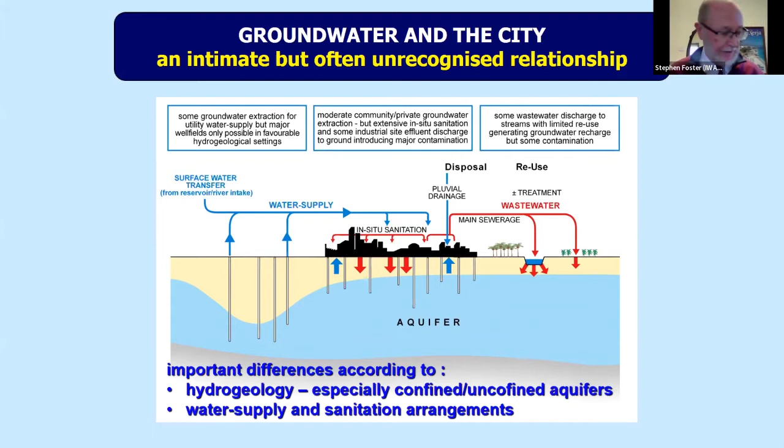Next, please. Groundwater and cities have an intimate relationship, but one that's rarely recognized. I've tried to depict it here in this small cameo with the freshwater side in blue and the wastewater side in red. And as you can see, there are many linkages. There are important differences in those linkages depending on the local geological conditions and whether aquifers are confined or unconfined, and on the water supply and sanitation arrangements. Next, please.

Groundwater is now known to be critical for the economical provision of water supply in innumerable cities and towns globally. And the current estimated dependent population is put in the order of 2 billion. Those figures are not all that reliable. Demand is always exacerbated in drought and under climate change scenarios. And local groundwater use wherever feasible is a key coping and adaptation strategy to climate change.

But rapid, uncontrolled urbanization is placing groundwater under increasing risk due to excessive exploitation and pollution. And this results in growing concerns over groundwater quality and potential impacts on human health, and also yield failure or reduction in many shallow water wells. Next, please.

Now, this is a two-way process. Groundwater is impacted by urbanization, and urbanization is impacted by groundwater use. We don't have time today to look at all of these things in detail, but I'll just give the scope of this. On the whole, in urban areas, you have increased resource availability because of recharge from water mains and seepage from in situ sanitation, despite land surface impermeabilization. But you have quality degradation from various processes.

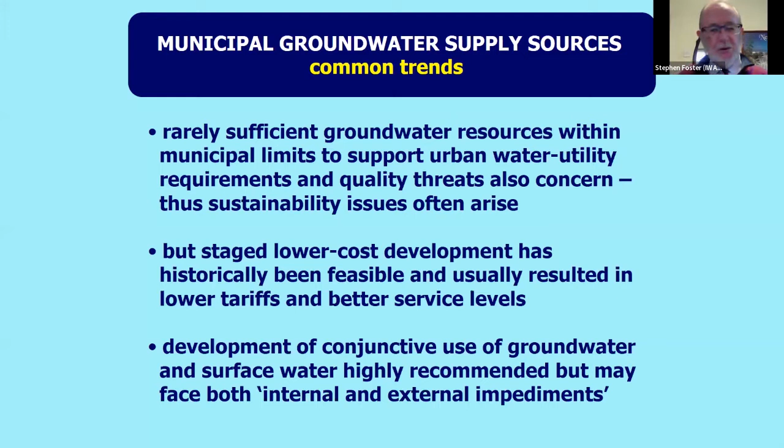I'm first going to deal with urban groundwater and some success stories in confronting the impacts of intensive abstraction. Next, please. Within the urban limits, there are rarely sufficient groundwater resources to support urban water utility requirements, and quality threats are also a concern, and thus there are nearly always some sustainability issues. But staged low-cost development has historically been feasible and usually resulted in lower tariffs and better service levels. And the development of conjunctive use of groundwater and surface water is highly recommended, but there are numerous impediments that have to be faced. Next, please.

I'll go first to Lima, where in the late 1990s and early 2000s, there was a successful application of demand side and supply side management measures to confront a serious situation. Lima is underlain by a major but not very thick aquifer, and it was heavily developed for public water supply. As you can see on the blue trace, this resulted in quite rapidly falling water levels and concerns about lack of water supply. These are further aggravated by the fact that the river in Lima is heavily polluted with mining waste from upstream in the wet season and is not treatable. So groundwater is essential for supply of something like 8 million people during the wet season at least.

So what was done, on an investment mobilized in part through the Inter-American Development Bank and the World Bank, was to enable nearly all the consumers in the urban area to be supplied both by groundwater and surface water, depending on availability. The main river tract where recharge occurs was improved and the recharge there increased. And a lot of construction was much better controlled. And as you can see, from about 1997, the water level stabilized at a groundwater abstraction of 720 megaliters a day on average, of which 320 is private.

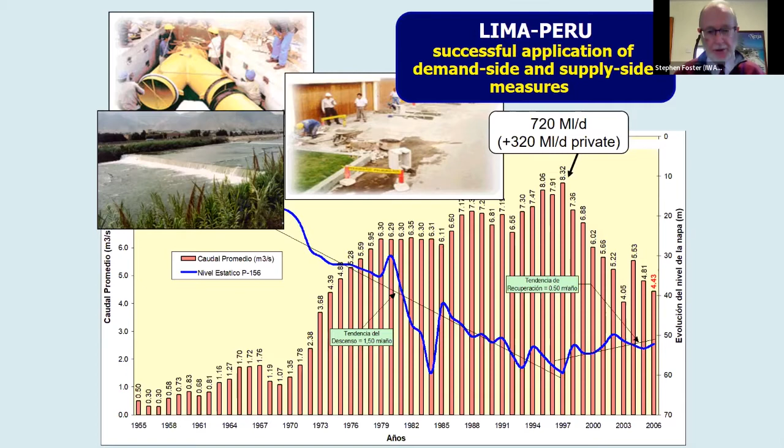And this is quite a success story for a country which has not had many environmental management success stories. And it was done by an unusual arrangement in terms of the institutions, with the government empowering the water utility to construct a special department for this work. Next slide, please.

Another success story is Bangkok in Thailand, which from the 1980s onwards was threatened by rapidly decreasing water levels and a lot of land subsidence in an area which was prone to flooding from the sea.

And what happened here was more conventional in the sense that the powers of the water regulatory authority were strengthened, and a variety of measures were taken, including a partial ban on new water well construction, closure of some existing water wells, alternative sources of municipal water supplies, and metering and progressive charging for groundwater use.

And this succeeded in stabilizing the aquifer condition in the late 1990s, and it's remained that way with some subsequent recovery. So two success stories of getting groundwater on a sustainable footing in developing cities.

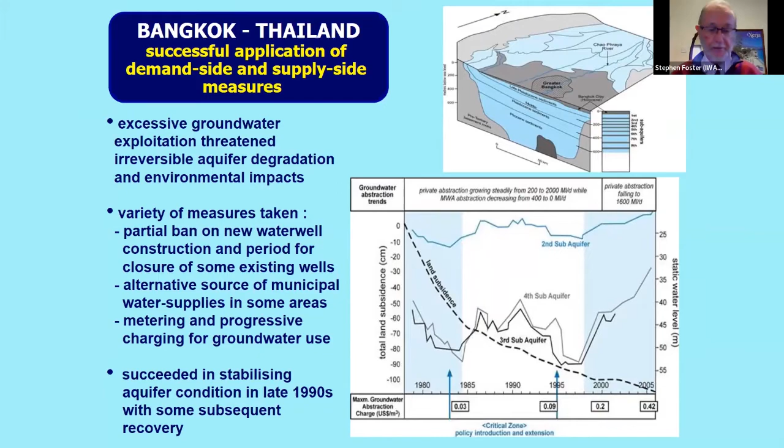Thank you. Next slide, please.

However, groundwater is also very significant volumetrically for in situ private self-supply. This greatly complicates the management equation where that occurs, and it's a major issue in Southern Asia, Sub-Saharan Africa, and parts of Latin America. Next slide, please.

It's a fast-growing phenomenon in urban areas where water well construction is of low cost, even when the aquifers are not all that prolific in terms of yield. It improves access and reduces costs for some groups of users, and represents a coping strategy initially, and very often a cost reduction strategy for those users in the longer run.

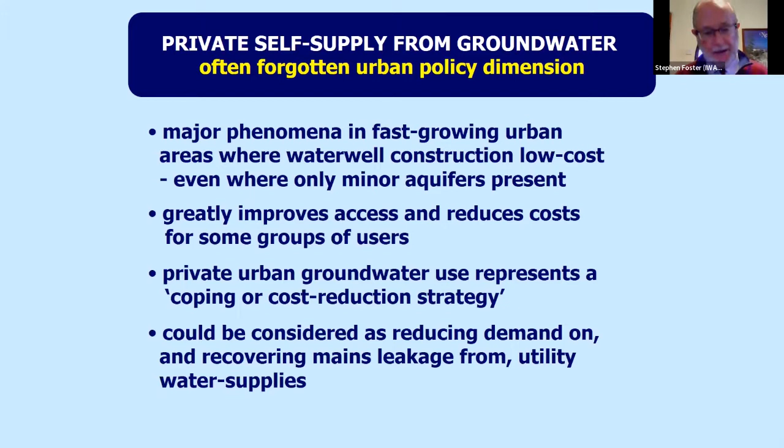It could be considered as reducing demand on and recovering mains leakage from utility water supplies, but it's much more complicated than that when you dig into the detail. Next slide, please.

My example here is from Fortaleza in Brazil, of which about half the population have water wells into dune sands. They're capable of providing about 40% of the total supply. And particularly all these high-rise apartment blocks that you see in the photograph tend to have high-yielding tube wells. And they're used these days to substitute utility water when their consumption exceeds the social tariff.

And there are consequent difficulties in administering the whole water sector in the city. For example, it's low-lying and largely sewered, and if people self-supply from their own wells, how do you pay for the sewerage? And they've now introduced measures whereby the water utility can collect sewage charges from all water users in relation to the size of their property, recognizing that an awful lot of sewage is developed through private groundwater abstraction.

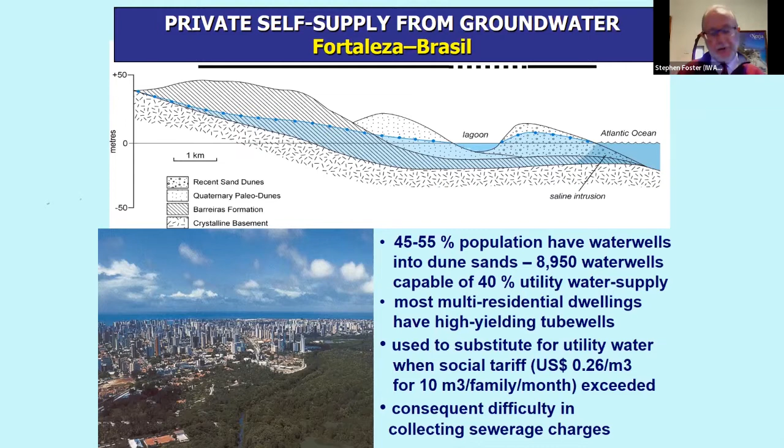And this is becoming a global problem. The worst city of all in the world in terms of the proportion of the total supply provided from groundwater privately is Lagos in Nigeria, where it gets up to about 75%. Next slide, please.

So this, as I say, private domestic self-supply distorts utility water operations and has implications for their finance and investment. It may encounter sustainability problems and also can represent a public health hazard because it's poorly monitored. But banning such practice is too simplistic, except where there are major public health or environmental hazards, and complex management measures are needed.

Enhancing recharge, reducing pollutant load, improving construction standards of private water wells and for in situ sanitation, advising users on potential hazards, charging and regulating for groundwater use. And in cities with this phenomenon, the struggle to sustainably manage groundwater is much greater. Next slide, please.

Now, I want to look at the quality issues and the contamination threats, in particular, managing the nexus with sanitation. Next slide, please. Wastewater via in situ sanitation, sewage leakage, wastewater reuse, spillage of industrial chemicals, ground disposal, and also solid waste disposal represents a common groundwater contamination threat in many environments.

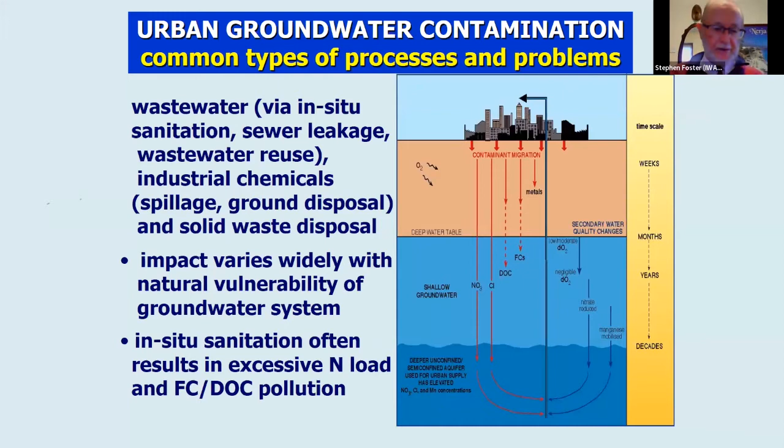Its actual impact varies widely with the natural vulnerability of groundwater systems, but nearly always in situ sanitation on a large scale results in excessive nitrate loads or nitrogen loads and fecal pollution. Next, please.

My first example here is from Natal in Brazil. This slide is a little bit small, but as you can see, the city has grown very rapidly from its size in 1984, just the small area marked by the blue arrow, to 2006, all of the red areas, and it overlies an excellent but relatively thin aquifer.

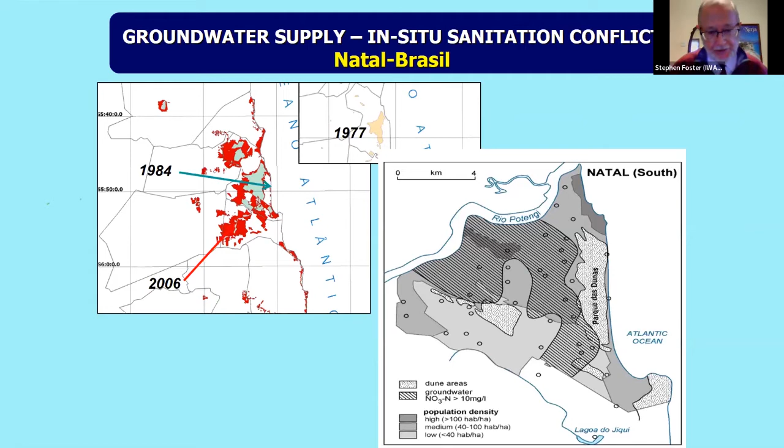And on the southern side of the city, as you can see in the other diagram, the groundwater nitrate concentrations are in excess of the World Health Organization limits in nearly all of the downtown areas. And this is a result of in situ sanitation mainly. Next slide, please.

If we're talking now about sewage sanitation, we have to look downstream for the problems created with groundwater. There are 4 examples here. The quality of the wastewater is in the pale orange circle above, and the good groundwater is in the bottom left-hand corner.

But many groundwaters downstream of cities that are sewered, in this case downstream of Mexico City, the Mezquital area, Leon, Mexico, Hat Yai in Thailand, and the Wadi Dhuleil in Jordan, have significant contamination, both in terms of salinity, nitrates, organic carbon, and other things. And this is perhaps the biggest outstanding challenge for groundwater in and around urban areas. Next slide, please.

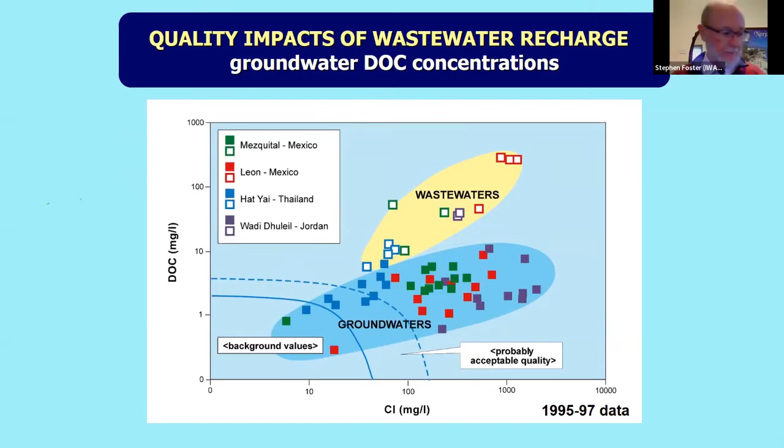You tend to see in developing cities in particular, these are on the top left-hand corner, typical wastewater being let out in canals for irrigation because it's considered a valuable resource, and then applied with flood irrigation, often to very poorly protected wells. This one is in Mexico. It's a major well for public water supply. As you can see, there is wastewater irrigation almost up to the wellhead. Next slide, please.

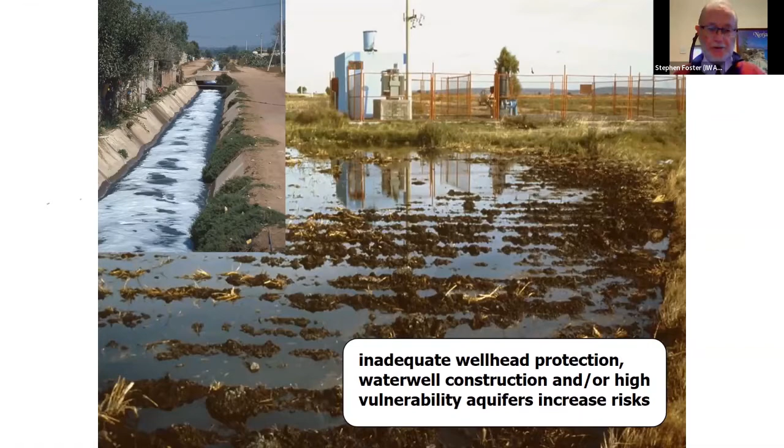And so where we do have sewage sanitation and wastewater reuse, groundwater protection involves improved spatial planning and use controls. The small pictures show that the better, more secure arrangements are ones in the lower of the 2 sections, where industrial wastewater is led off elsewhere and separated and not mixed. The domestic wastewater goes to recharge lagoons and then may be used via wells for irrigation with more security. And the public water supply should be outside of these areas and protected in a spatial sense. Next slide, please.

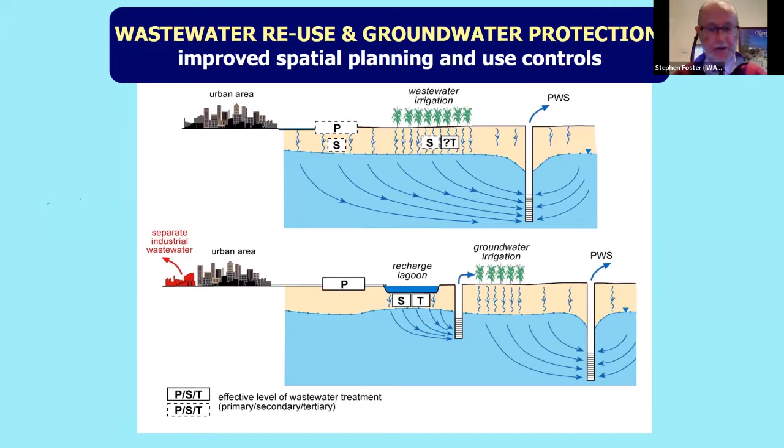I've talked about the conflict. It's not an easy one to manage. Even in terms of better sanitation, dry eco sanitation systems with urine separation offer the best type of solution, but you can't retrospectively fit these. So very often the way forward is construction of external well fields outside municipal limits, but they need the areas around them to be controlled against uncontrolled urbanization. They need much better protection, and they also need separation from the main sewer outfall areas. Next slide, please.

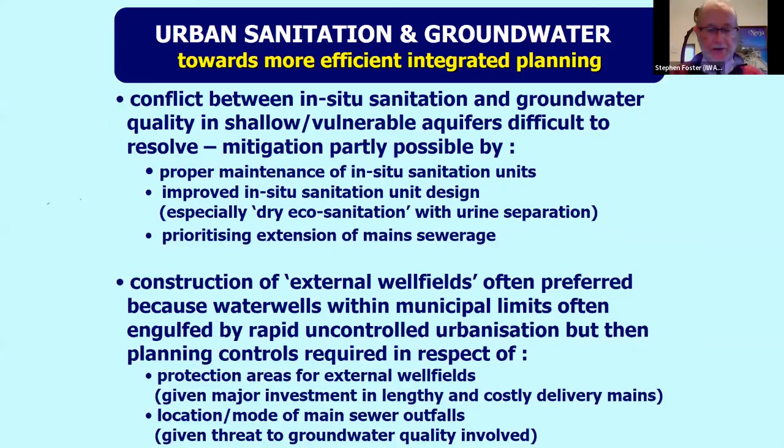So let's just have a brief word on something I don't think we're going to deal with much today, which is the control of impacts on urban infrastructure of groundwater use in urban areas. Next slide, please. It's an evolving relationship, that between groundwater and the city. It starts with a tendency, in the upper of these three sections, to a falling water table, possibly land subsidence, and other problems for the urban infrastructure and well reductions. But as the cities grow and water utilities wisely go outside and collect their groundwater from peri-urban well fields, you can get rebound. And here you're seeing rebound coming up.

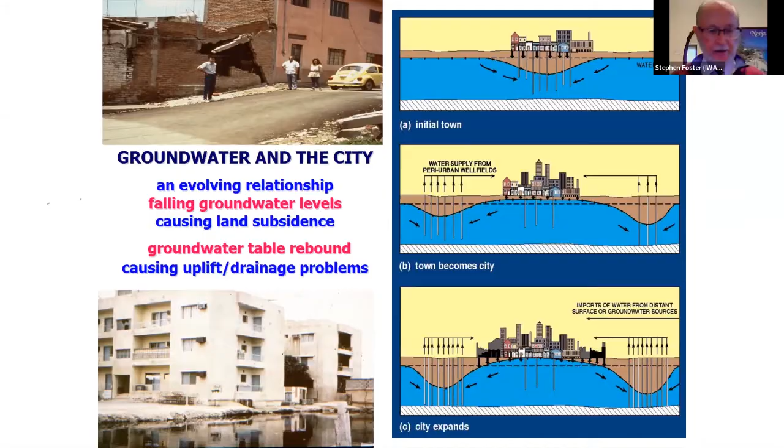And in the end, in the lowest picture, it causes problems for the infrastructure of the city itself, uplift problems on properties and drainage problems that you can see in my lower picture. So these are some of the environmental problems associated with poorly managed groundwater use and then abandonment in urban areas. Next slide, please. So this is my last slide, and I'll just take this a little bit more slowly.

Urban groundwater, we need an integrated vision. We've got to see all these facets and how they interact. It's always more significant in overall water supply than appreciated, and often the invisible link between various facets of the urban infrastructure. Urban groundwater, therefore, should be managed, even if no major utility supply interests exist. A casual laissez-faire approach is often costly and hazardous. Urban groundwater affects everybody, but still tends in many places to be the responsibility of no specific organization.

Broader stakeholder involvement, therefore, is essential, but who should take the management lead? Obviously, in the classic model, it would be the Water Resource Regulatory Agency, but very often they do not have enough capacity to do that, and you need greater involvement from the water utility, the municipal authority, and the public health ministry. Some sort of permanent sitting group of these bodies, advised by people who have a good understanding of the resource, is probably the best way to take the management forward. So I think that's my last slide.

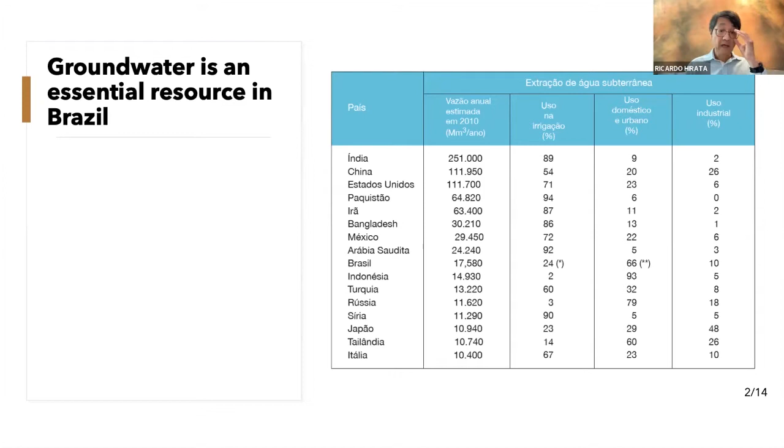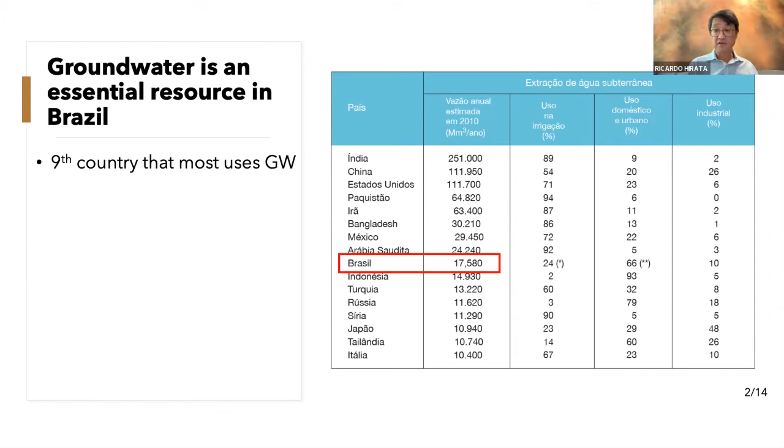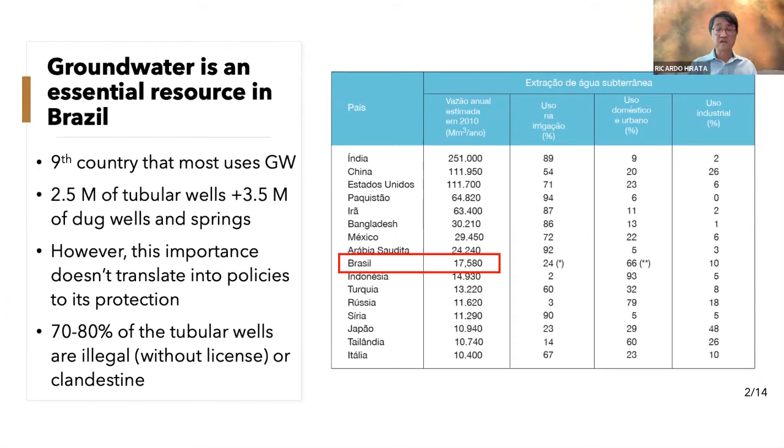And the country is the ninth largest user of groundwater, extracted through 2.5 million tubular wells plus 3.5 million dug wells and springs, mainly in the rural areas. However, this importance doesn't translate directly into policies and protections, as I show during my presentation. And one number that I like to mention is that 70 to 80% of the tubular wells are illegal. It means without license or even clandestine.

Surface water supplies 82% of the population in terms of public water supply in cities. However, it's essential to recognize that groundwater supplies 52% of the cities. It means that most small and medium-sized cities are totally or strongly dependent on groundwater, and it's a very significant resource for them. However, the importance of groundwater for cities is also associated with complementary supply to public mains, and sometimes this importance is hidden by official statistics. That's the reason I want to present the case of the São Paulo metropolitan region.

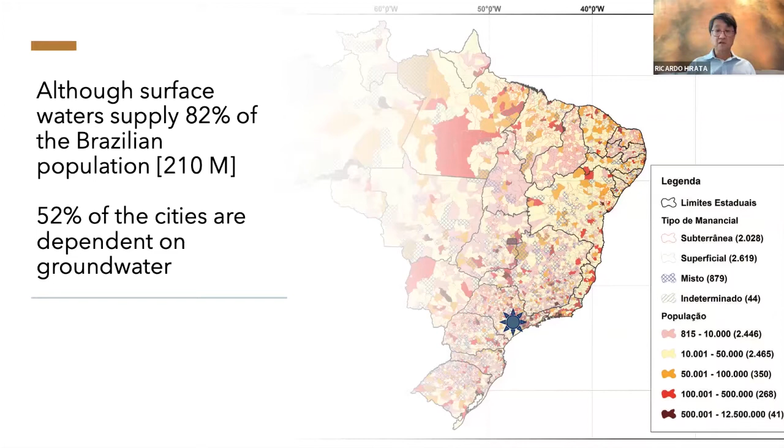This is the location. São Paulo is just under the Tropic of Capricorn, in the southeast of the country, pretty close to the coast. Well, Metro São Paulo has a population, as I mentioned, of 22 million inhabitants. The public water supply system is a very complex system of tunnels, treatment plants, and reservoirs that provides the city 64 cubic meters per second. It means that almost all the water comes from surface sources.

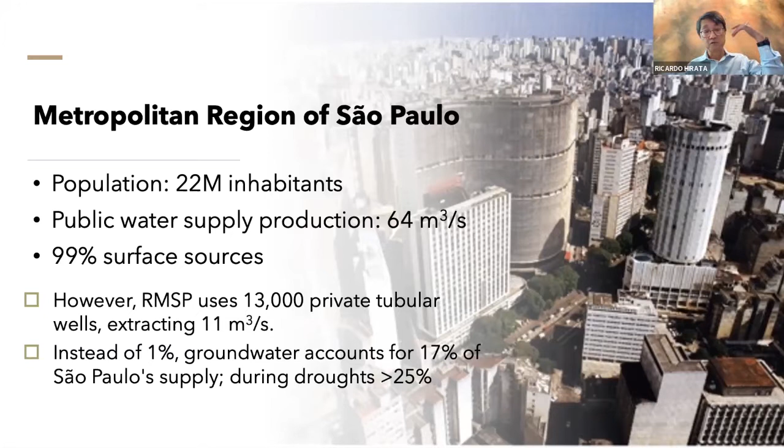However, the metropolitan region has 13,000 private wells that in total extract 11 cubic meters per second. That means it is one of the biggest cities in Brazil that depends on groundwater. Instead of 1%, considering 99% surface water, groundwater actually plays a much more important role and represents 17% of the total water that the city needs. During the last two droughts, this number reached up to 25%.

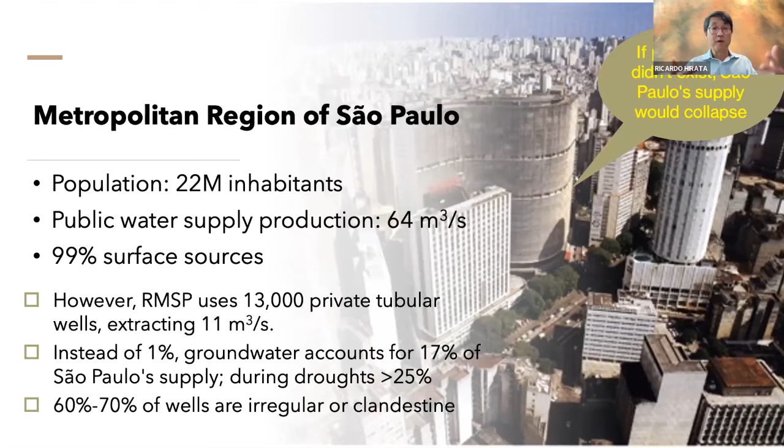The problem is that the city is really dependent on private wells, and our concern is that 60 to 70% of the wells are irregular or clandestine. São Paulo is a little bit better than the rest of the country, but it's still a really high number. It means that the water security of the city depends on unregulated wells in a very big sense. I can say that if private wells didn't exist, São Paulo could probably collapse, since we don't have 10, 11 cubic meters per second extra to supply if something happened with these private wells.

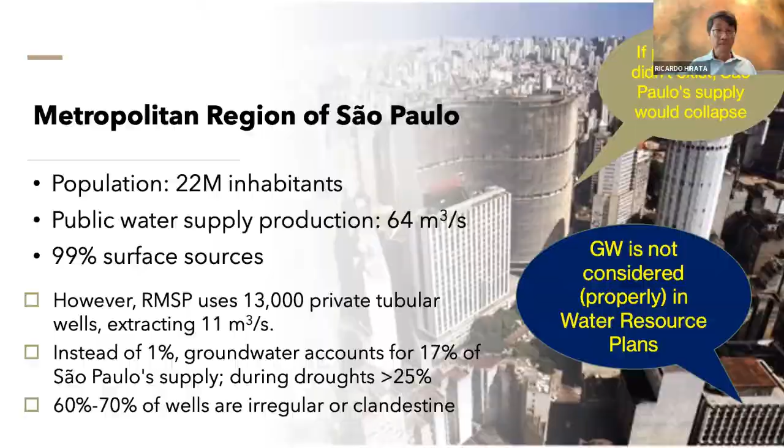And because this supply is not official, groundwater is not considered properly in the water resource plan. Well, what's the moral of the story so far? Groundwater is hiding behind the official statistics, beyond the perception of society and water resource management. It is in private supply that groundwater makes a difference in São Paulo, but also in Brazil, and I can say in Latin America. And it is not covered by the official statistics.

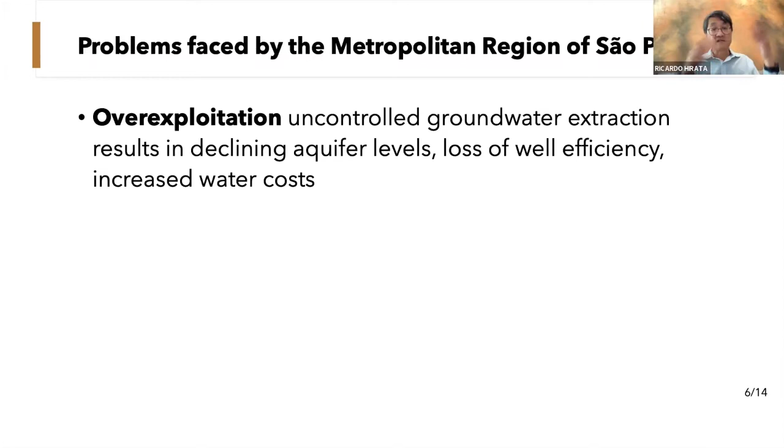Well, there are two main problems, I think around the world. The first one is overexploitation: uncontrolled groundwater extraction results in declining aquifer levels, loss of well efficiency, and increased water cost. The second is contamination, and I like to point out the problem of nitrate, extensively affecting the aquifer below the cities. Even in the case of São Paulo state, the coverage of the sewage network reaches, for example, 96%. It means the problem is not the sewage network; the problem is leakage, because of low maintenance.

And also, of course, São Paulo has a very long history of industrial plants and development, and the chlorinated solvents are another big problem. It's very persistent in groundwater and is very toxic, and also heavy metals. That's much more local in some places of the city.

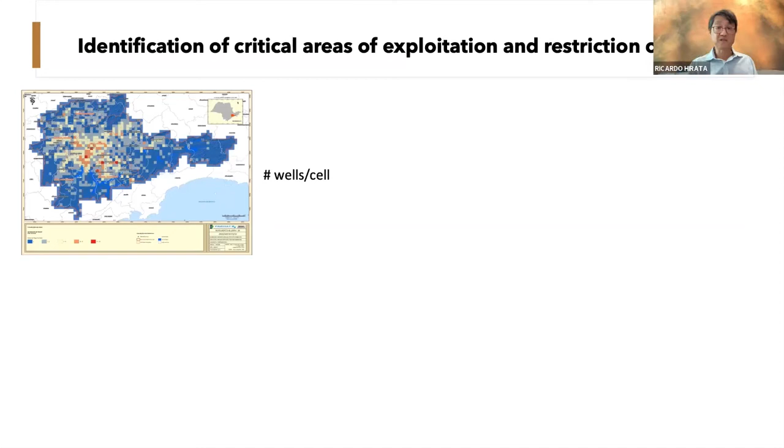So far, we have more than 6,000 areas that were declared contaminated. It means that monitoring wells were drilled, samples were analyzed, etc. Risk analyses were made. It means a complete study to understand the situation, and you have this in 6,000 areas. And in some places, you have the final remediation phases in more simple cases.

Using this potential contaminant load inventory that I mentioned previously, but applied to contaminated areas, we believe that we have 70% more contaminated sites in the region that you have to discover. We propose to identify potential critical areas using this approach, to identify the higher probability of soil and aquifer contamination, to implement these strategies.

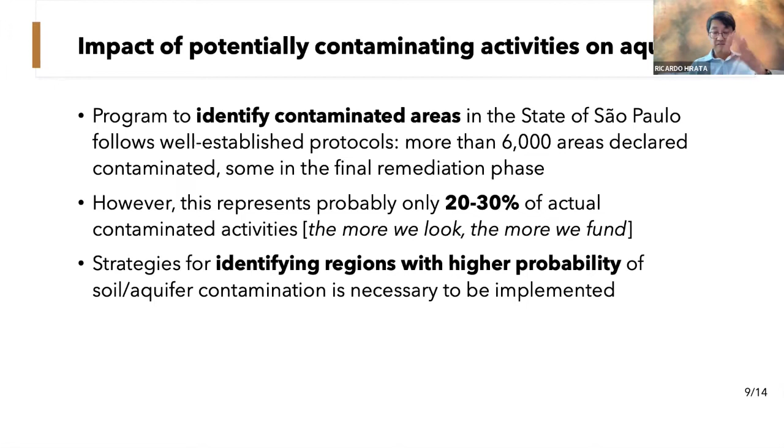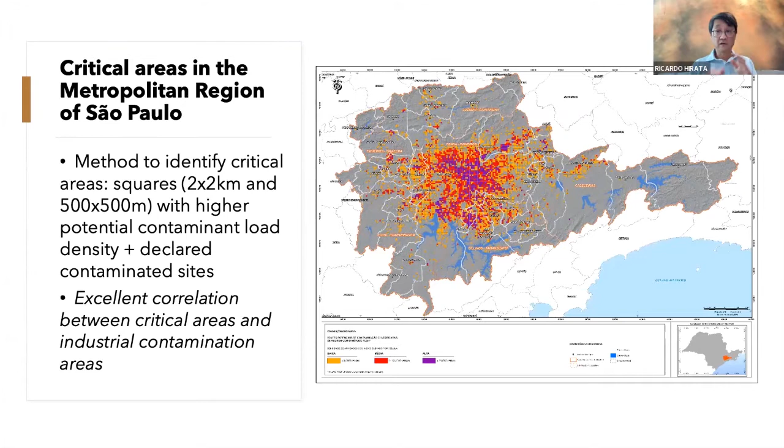That's the map, using the same approach of the squares, starting 2 by 2 kilometers and after 500 by 500, and also places that were declared contaminated. And we had a very good correlation with the proven contaminated areas in this methodology, and we are using this to help the environmental agency handle the groundwater use in these places.

Speaking about the irregularity of the exploitation of private wells in the state of São Paulo, but also in the metropolitan area of São Paulo, we conducted an opinion poll directed at the stakeholders, and we had 275 respondents that indicated the irregularity of the wells.

That is our big concern. 84% of people consider that the legislation is good enough. However, there is a lack of surveillance, inspection and law enforcement for 71%. It means that we have a good law, but not well applied because of the incapacity of the government institutions to apply this law in 64% of the cases. Another interesting result was that users see no problem in having irregular wells for many reasons, for 71%.

And nothing will occur to them because of the irregularity of the wells. It means impunity in 59%. People just say, okay, it's not so big a concern to have my irregular wells, and if something happens in the future, it's no problem either. Users do not perceive benefits in having regular wells.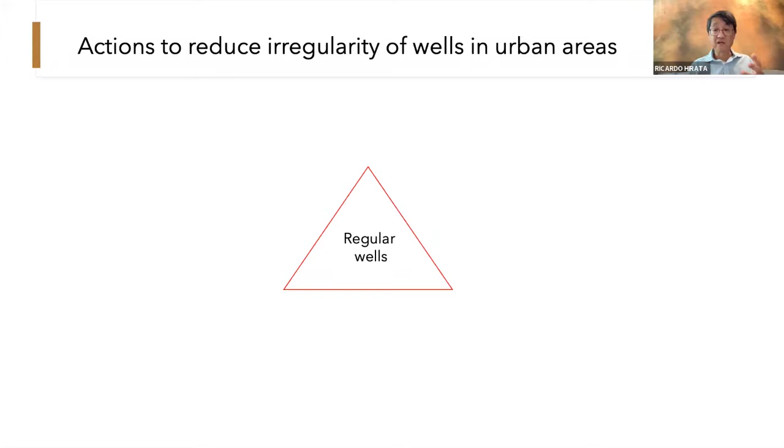Based on these results, we understand that mechanisms to regulate illegal wells must go further than the command and control approaches. That's the traditional base of our law and our regulation. And we must introduce other mechanisms if we'd like to overcome extraction problems in developing countries like Brazil or even in Latin America. To do that, we consider this triangle with 3 pillars.

One is the classical command and control mechanism that obligates users to regularize the wells by police control. But, as I mentioned, we know that without surveillance inspections and law enforcement, this doesn't work adequately, mainly in countries like Brazil, in Latin America, with a long history of weak institutions and democracy problems. In this way, we have to consider the second pillar, that is user awareness.

In this case, it means convincing irregular users that irregularities or problems caused by the uncontrolled extraction bring losses to the users and to everybody, including increased cost, investment loss, etc. That's the motor to convince people to be regular, because of the problems of conflicts or problems of increased costs and losses.

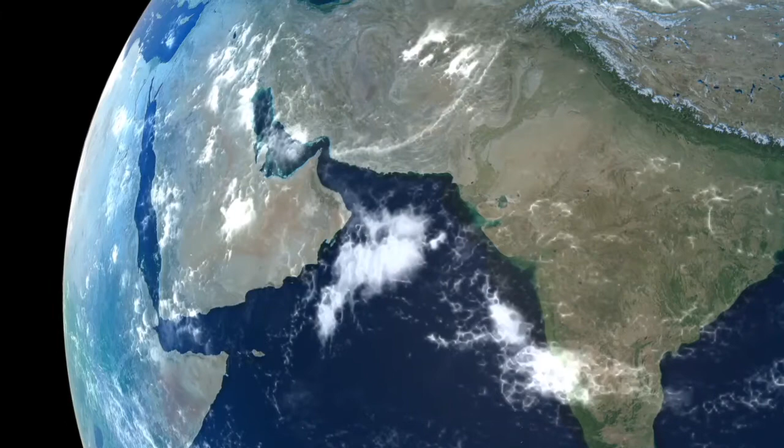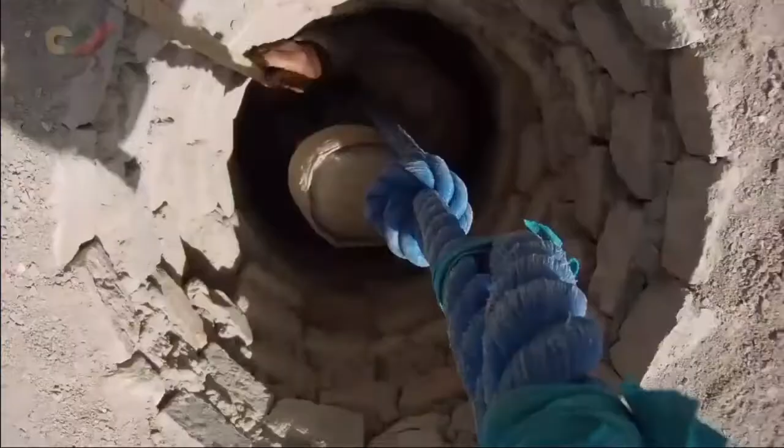Old Persia was once the land of hydrogeologists who could drain a limited amount of groundwater without depleting the aquifers. Many consider the Persian civilization the Kariz civilization. Qanat or Kariz is a system of transferring water from an aquifer to the surface through a gently sloped tunnel. Qanats are hand-dug tunnels that begin in the foothills of the mountains and wind gradually downhill to bring water to the homes kilometers away. A horizontal tunnel with a gentle slope that partly cuts through the aquifer.

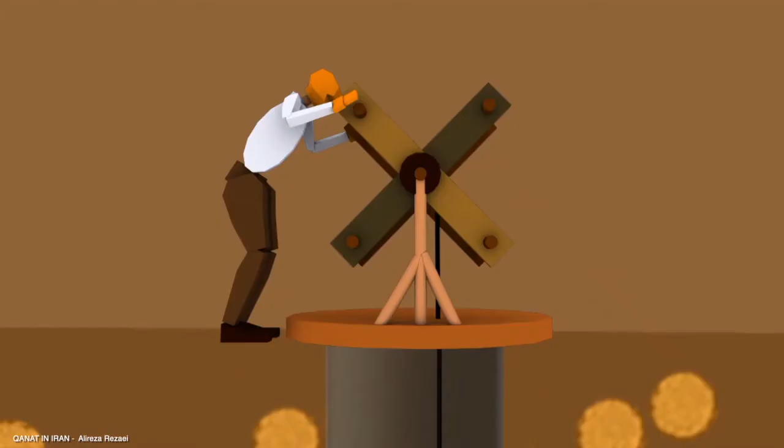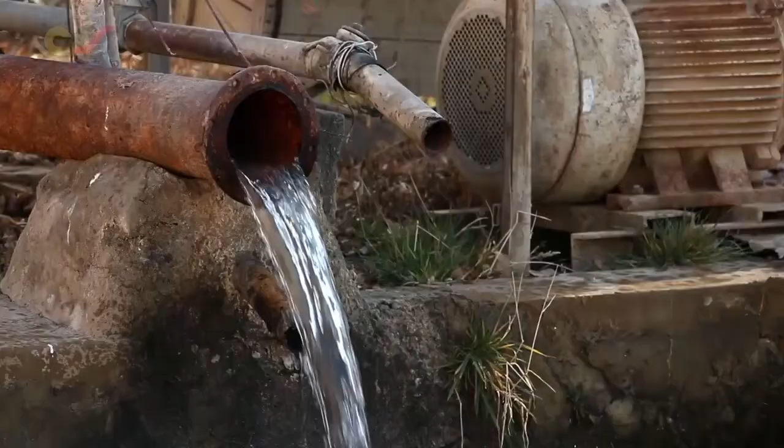The slope was quite sensitive, as if it was too steep it would wash away the tunnel, and if it was not steep enough the water wouldn't flow. So it was quite an art to make these qanats. Qanat is known to be the most sustainable means of transporting water in arid zones, as it limits evaporation. Old Persian water managers understood this. So what happened to the land of sustainability? What went wrong that forced many villagers to leave their homes and lands in the new Iran? This. And most certainly this one.

More than 90% of Iran's renewable water resources are consumed by the agricultural sector. Most of the water needed for farming comes from aquifers. Also, some power plants have drained groundwater resources like this one near Hamadan, which was once a water-rich area. Now let's see what farming and power plants could do all together to a plain like this in Kabudarahang near Hamadan.

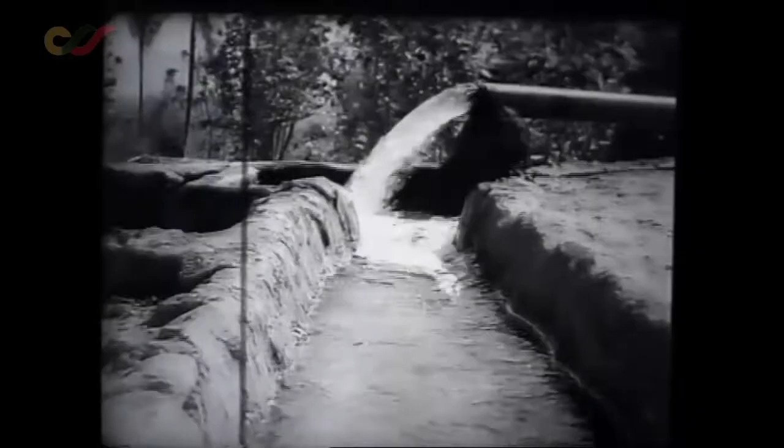After World War II and the commencement of Truman's Point 4 plan, many Iranians were introduced to deep well drilling machines and powerful diesel and electric water pumps.

In 1963, the late Shah's land reforms gave many peasants a chance to own their own lands. And through the loans provided by the banks, these new landowners were able to dig wells and purchase water pumps. This enabled the farmers to extract groundwater individually, and each farmer extracted as much as he wished. Lack of supervision and failure to enforce laws and regulations gradually depleted the aquifers in many farming districts.

In the past 60 or 70 years, we have overexploited our aquifers to the tune of, on average, 7 to 8 cubic kilometers a year. Therefore, we have to replenish this water. If we continue using this much groundwater, we are going to end with dry aquifers and mass deaths of our people.

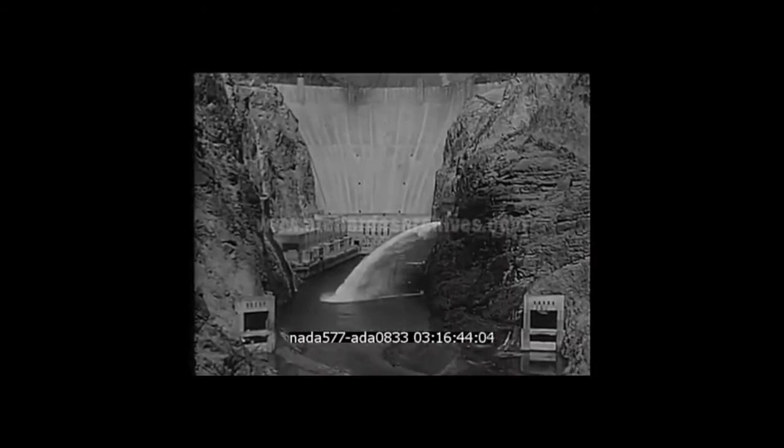While the Shah liked building mega dams after falling in love with the Hoover Dam in 1949, some officials neglected the fate of groundwater resources. Before the 1979 Islamic Revolution, farmers and water managers dug almost 80,000 wells all around the country. Gradually,

Obtaining digging permits was harder for farmers, but it got much easier after Ayatollah Khomeini and his pupils came to power. They encouraged farmers to produce grains without regard for water consumed in the process. Many farmers dug wells without any permits and exploited the aquifers beyond the system's balanced inflow and outflow of water. This was a bad sign.

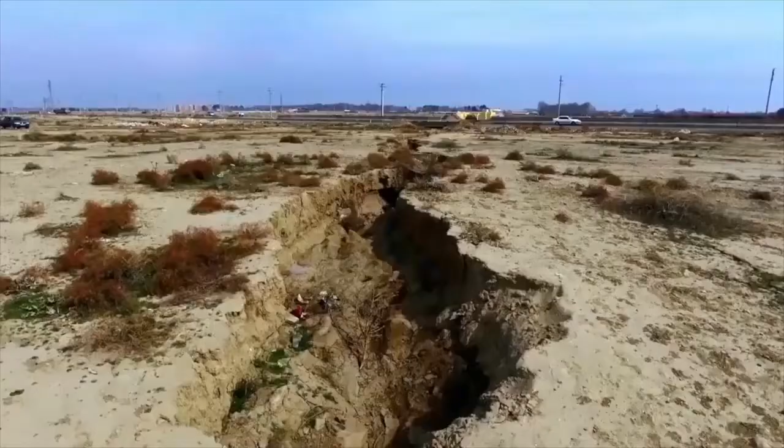The Iranian government also followed the path of building dams. This time, it was on steroids, and groundwater depletion had become a new normal. The new leaders were obsessed with mega dams. For them, it was a sign of power and prosperity.

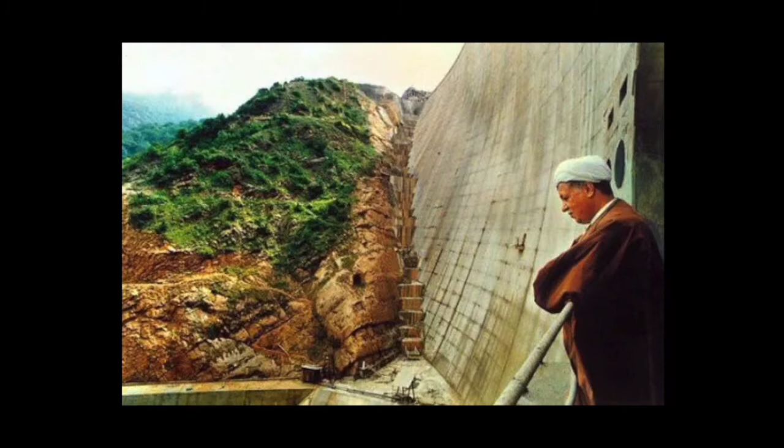In the spring of 2001, I wrote 2 op-eds criticizing the Khatami administration for its water policies and building too many dams without understanding the consequences. The president summoned me to his office, and I met him 3 days after his re-election to explain my points. I took my father with me.

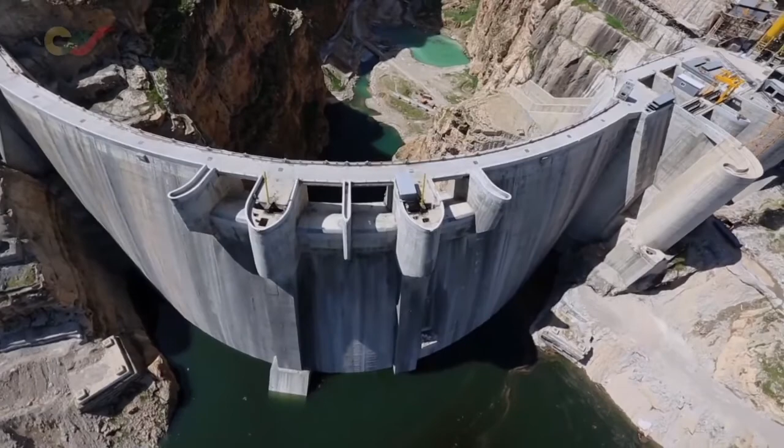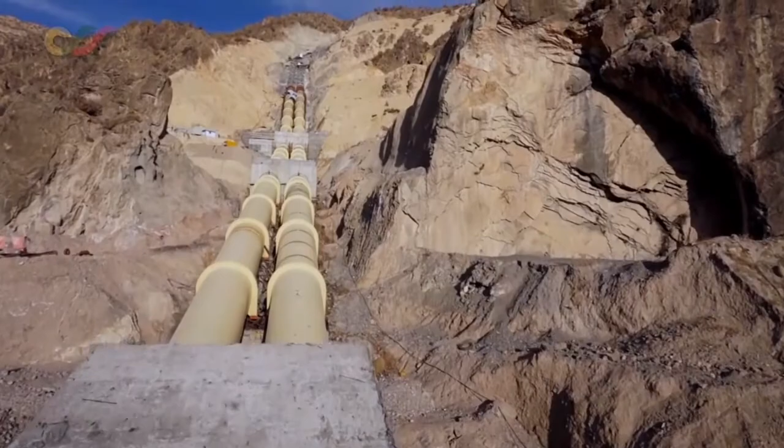We told him that his administration's concerted efforts towards dam building and interbasin water transfer blatantly disrespected Iran's aquifers and ignored the warning signs that would have a very negative impact on the country in the next decade. His government took our points seriously by ignoring the warnings and censoring me.

In the next decade, thousands of villages that once relied on qanats had lost the battle to wells and water pumps. With no water and plains becoming victims of subsidence, millions of farmers left their homes and lands to settle in shantytowns.

We have water shortage in many places, in hundreds of villages which are short of water. In the old days, they used to be supplied by qanats, but most of them have been dried due to the overexploitation by powerful pumps.

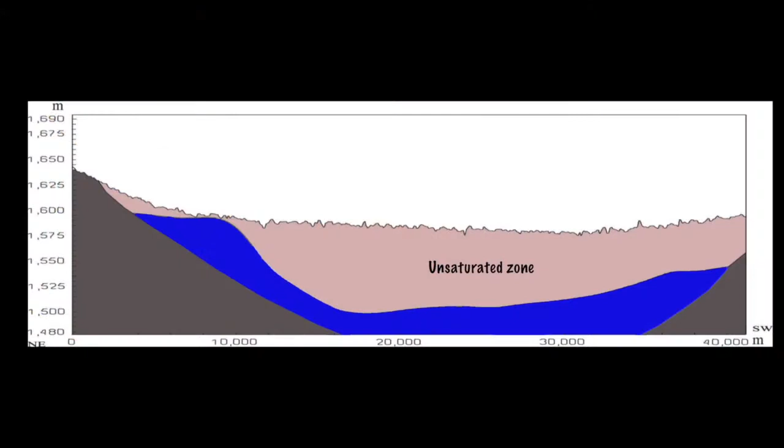Isfahan is now one of the major hotspots of land subsidence in Iran. The aquifer beneath the Isfahan-Borkhar plain is half empty now and is on the path of demise based on assessments. The dry bed of Zayandeh Rud, the major river that passes through Isfahan, became a political hotspot in November 2021.

Isfahan, once the capital of Persia, is now a sinking city. The jewel of central Iran has experienced many droughts through history. Still, its water managers before the last century used its resources wisely and sustainably through the ages to save it for the very generations that are witnessing its destruction.

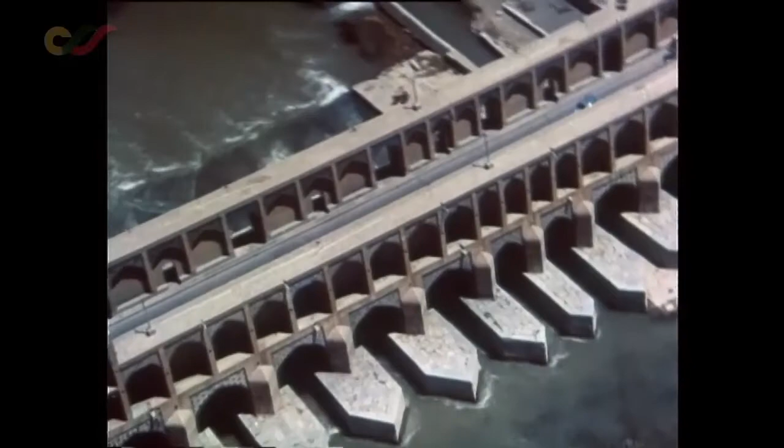After World War II, the government's water managers transferred water from one of Karun River Basin's tributaries, the Kuhrang River, to Zayandeh Rud. Later in the 60s, the government built a major dam to store water and regulate the river. This excessive amount of water was seen as a sign of wealth. The area under agriculture in the Zayandeh Rud Basin expanded, and many farmers began to cultivate rice and wheat.

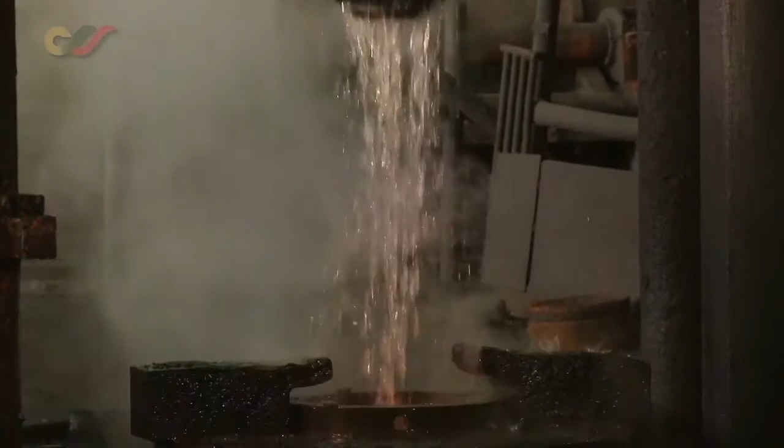The government inaugurated the country's first steel plant in the arid central Iranian plateau, only relying on the flow of Zayandeh Rud that was receiving constant doping shots from Karun. After the 1979 revolution, a second steel plant that was first supposed to be built near the Persian Gulf was established near Isfahan, stealing more water from the basin to produce more steel.

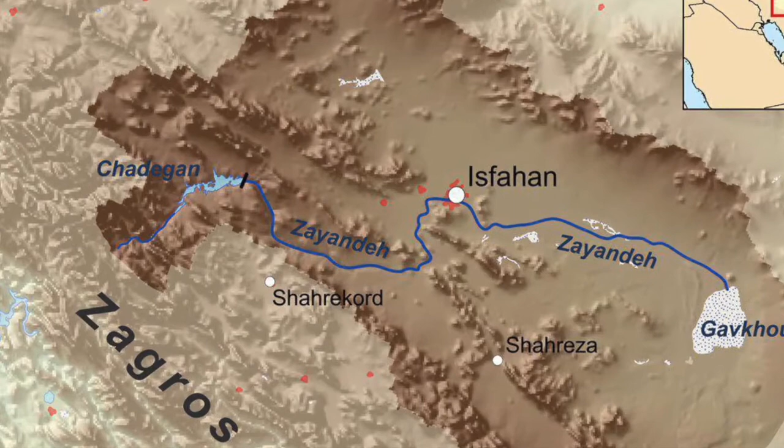From 1998, a major and long-lasting drought started, and because of overconsumption and decreasing rain and snow, rivers such as Zayandeh Rud shrunk. Zayandeh Rud, which originates from Zardkuh in the Zagros mountain range, is the most critical and strategic river in the central Iranian plateau. People settled near this river, and the city was born thousands of years ago during the Bronze Age.

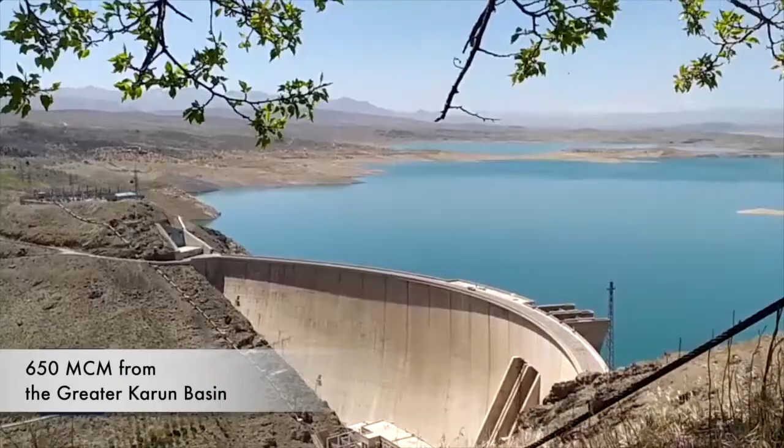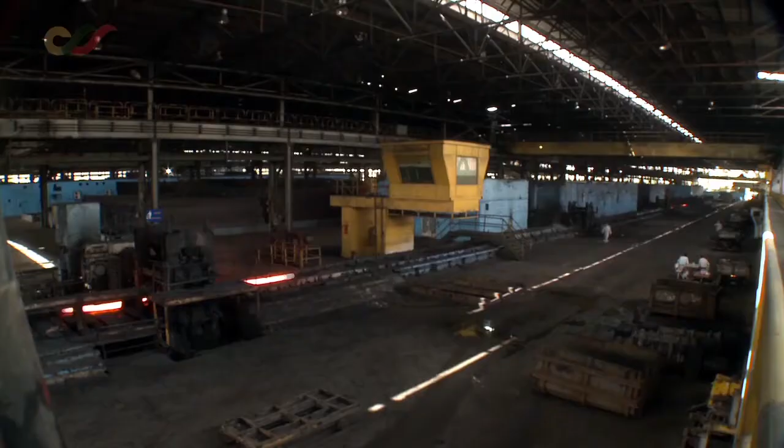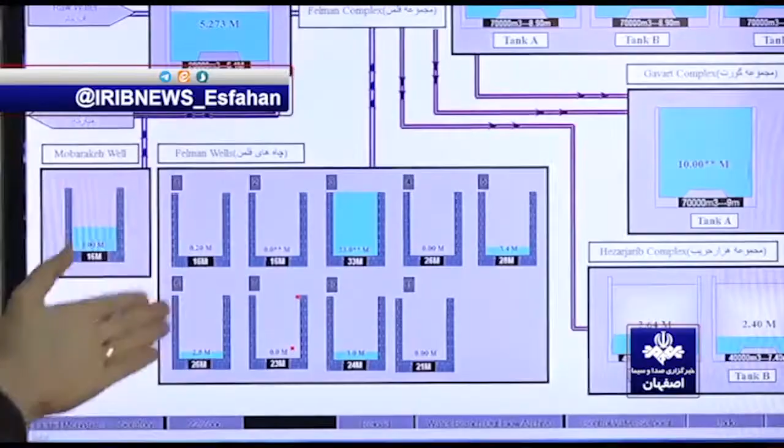Consumption of drinking water and sanitation has increased from 60 million cubic meters to over 400, and part of the water is being transferred to cities like Yazd and Kashan. Industries draw about 70 million cubic meters of water from the river and use the rest from wastewater treatment. The defined consumption for the Zayandeh Rud River is about 1.5 billion cubic meters, while the river has an average of 1.1 billion cubic meters in the last few years. And last year, it became much less. So the rest comes from aquifers.

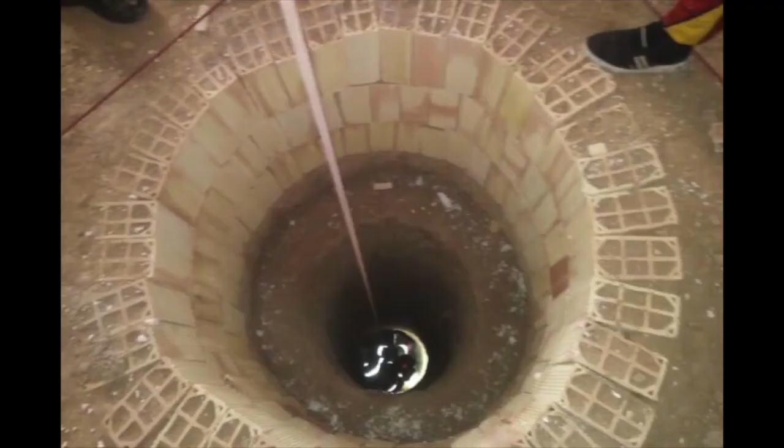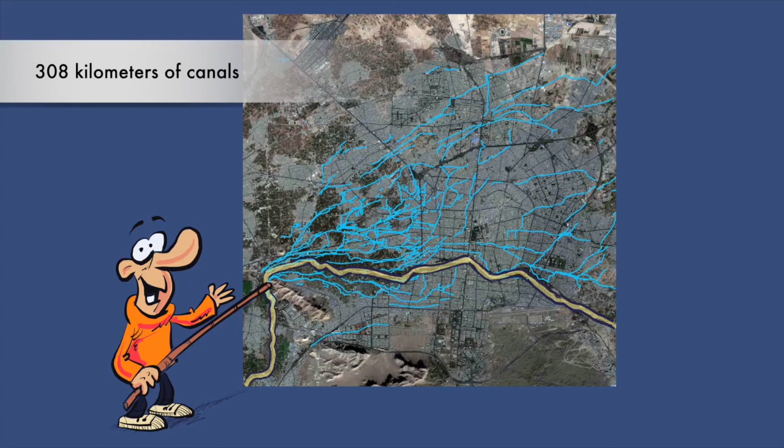After the drought struck in the late 90s, farmers who didn't want to change their routine started digging more wells and extracting more water from under the ground. The balance between the aquifer and the river was gone, and later signs of land subsidence appeared. A network of canals called Madi channeled water from the river to farms and orchards in the past. After the drought and transfer and consumption forced Zayandeh Rud into its disappearance, the city dug a few dozen emergency wells. Madis were essential in recharging the aquifer, and now they're dried up.

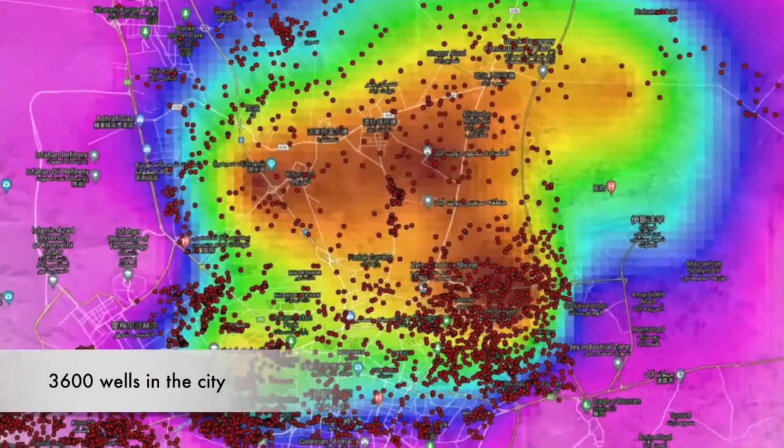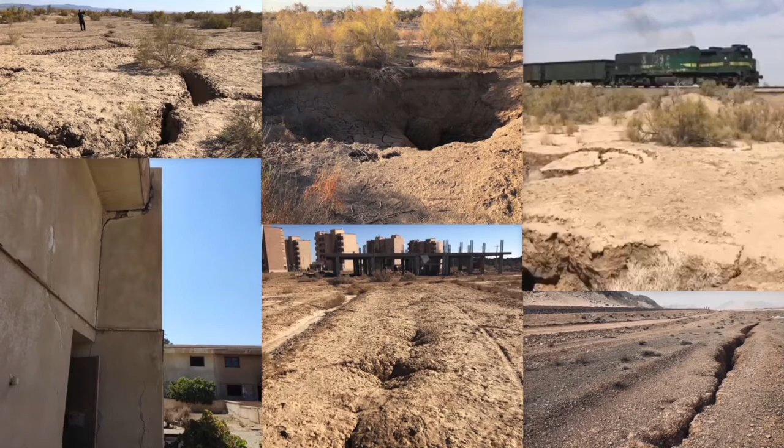Over 5,400 wells in the Isfahan-Burkhar plain have become the only options for farmers. Half of the 1.7 billion cubic meter aquifer is now gone. Under today's regime of overdrafting, the aquifer will most likely die in the next 9 to 15 years. And through time, this has caused subsidence in the area, from a few millimeters on the edge of the Isfahan-Burkhar plain and aquifer to almost 18 centimeters per year in the middle of the plain, where people are feeling the heat, with a gradual destruction of their homes. Many have had to evacuate and leave.

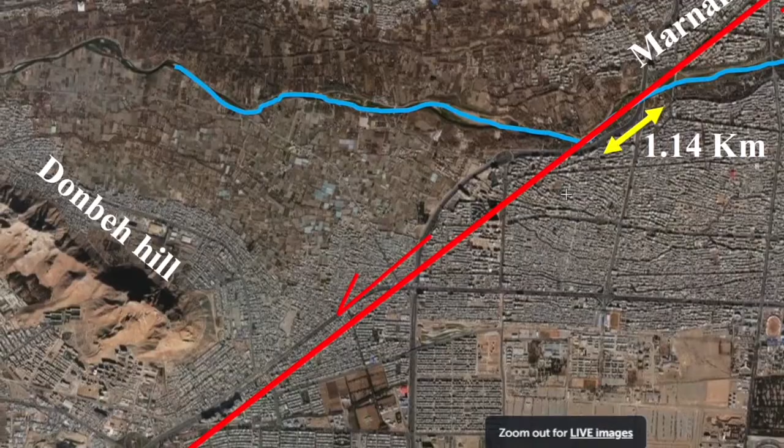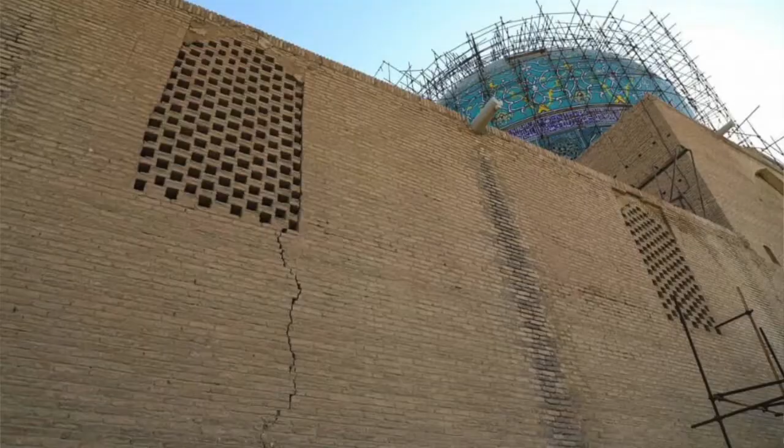Recently, an official from the Ministry of Roads and Urban Development told me that considering the presence of active faults in the area, Isfahan is now turning into a high-risk city after thousands of homes have been affected by land subsidence. Reza Islami, the head of Iran's Geological Survey in the Isfahan province, says that the continuation of this situation and the exploitation of the aquifer will damage more than 6,000 historical structures, including old mosques, homes, and bridges in the city of Isfahan.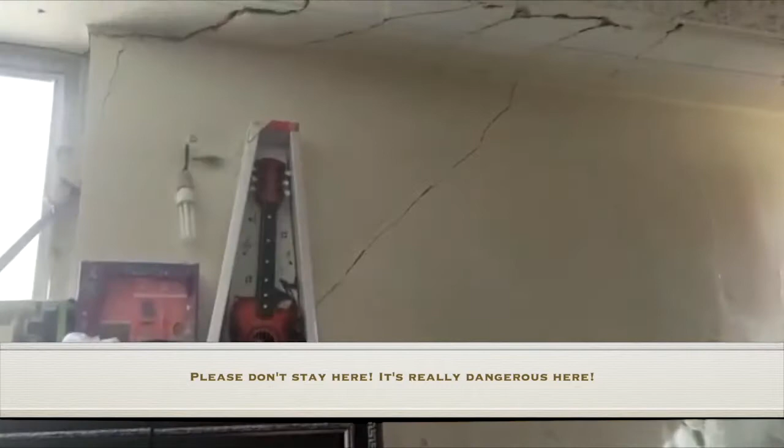A few years ago, 2 scientists published a paper indicating that between 2003 and 2017, there were 3 distinct subsidence features in Tehran with rates exceeding 25 centimeters per year in the western Tehran plain, approximately 5 centimeters in the immediate vicinity of Tehran International Airport, and 22 centimeters per year in the Varamin plain in the southeast of the capital.

Tehran is a megacity with inadequate infrastructure built over an alluvial fan south of the Tochal mountain. For thousands of years, smaller towns and villages relied on a number of streams and qanats. In the 1800s, when the Qajar dynasty chose this part of the country as the capital, many moved to the new center of the Persian civilization. The radical development of the city started after the downfall of the Qajars, and the new king had high hopes to turn Tehran into a modern capital.

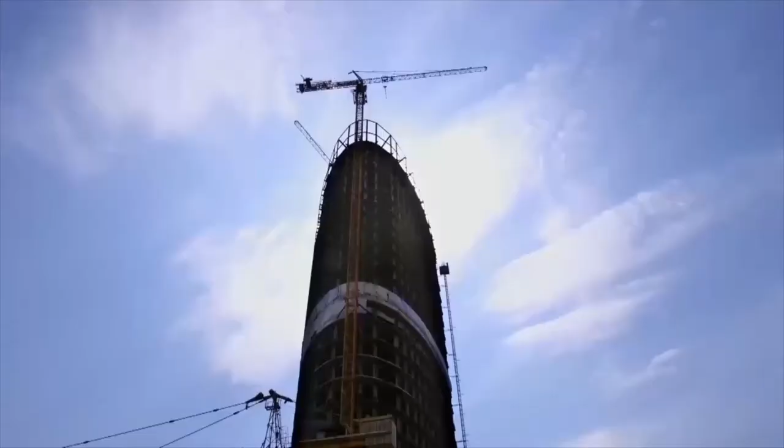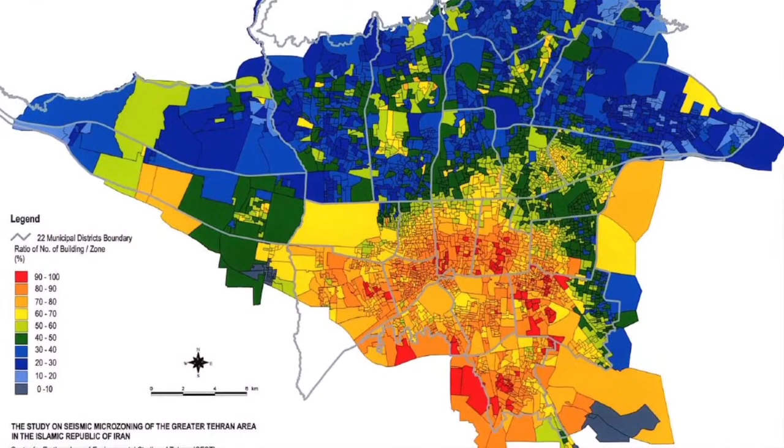Between the 1960s and the 1980s, many land developers and house builders began building settlements and suburbs regardless of soil resistance of alluvial fans and qanats, and after the Iran-Iraq War, many skyscrapers appeared all around the city. Seismologists are awaiting the return of a large earthquake, and according to estimates, the death toll from this earthquake may exceed 100,000 people. Although civil engineers were concerned about buildings' resistance to sudden shocks of earthquakes, they paid no attention to land subsidence, which has turned into a silent earthquake.

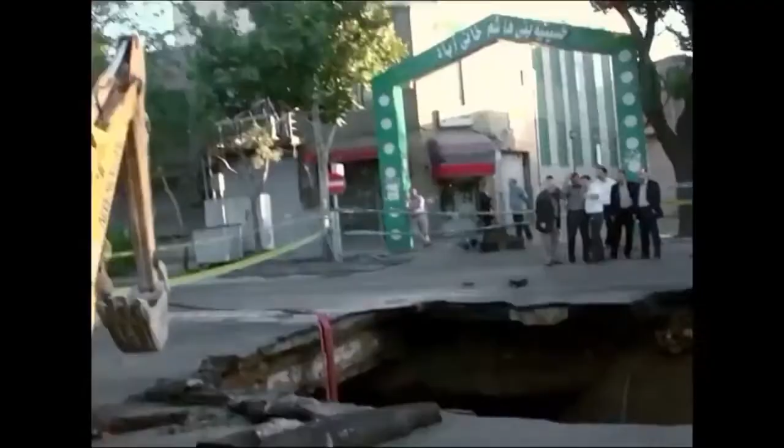Cracks have appeared in many townhouses and condominiums and suburban homes, and sinkholes have emerged all around the capital. Parts of the city are sinking with a record of 25 centimeters per year, close to what we have seen in Corcoran, California. To add insult to injury, cracked buildings and weakened structures due to subsidence will have very little resistance to the large-scale earthquake that awaits them. And this will greatly increase Tehran's risk of destruction.

Gary Sick, one of the members of the National Security Council under Ford, Carter, and Reagan, and an expert on Iranian politics, once told me that the effect of a major earthquake and drought is beyond a coup d'etat against the Islamic Republic. I think his statement is true, especially because the regime has not treated water, the planet's most precious gift, with care.

There are many solutions. These are a couple of them. Improving agricultural policies, having an integrated water management system, environmental accountability should be there, applying environmental justice, and electing smarter leaders. The most important activity is recharging aquifers, which have been depleted in the past 80 years after the introduction of pumps in Iran.